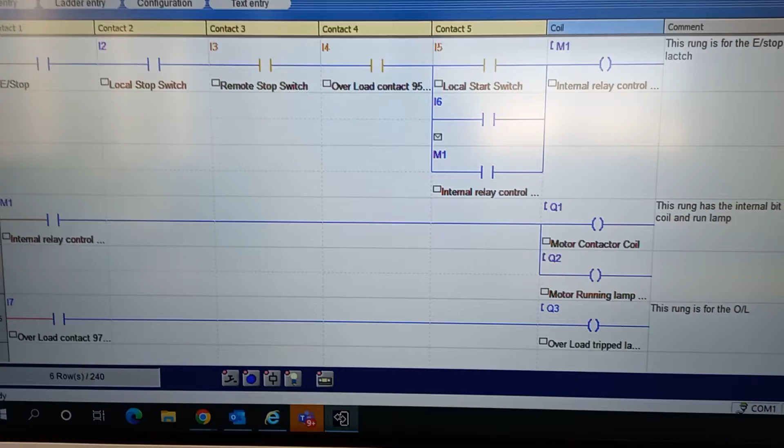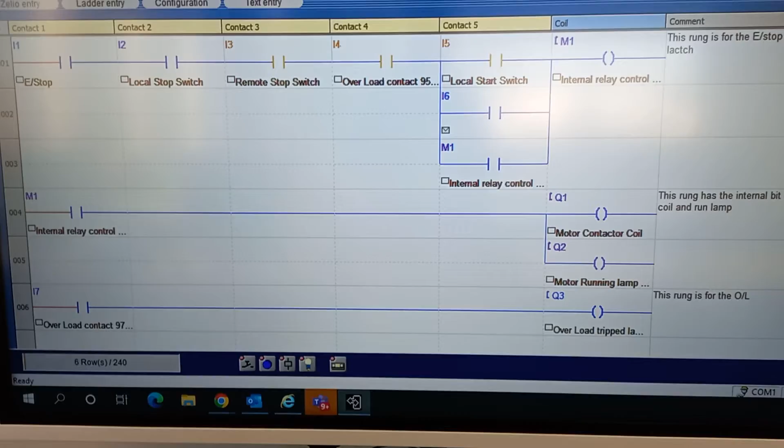Here we have a typical direct-on-line motor starter control circuit. I've done this on the Zelio Soft 2 software, and it's actually running in the simulation mode at the moment. Now I've programmed my e-stop and my local stop and my remote stop as normally open contacts. The reason I've done that is that in the field they are actually normally closed contacts. So by programming them as normally open, when the PLC goes into the run mode, they will then go true.

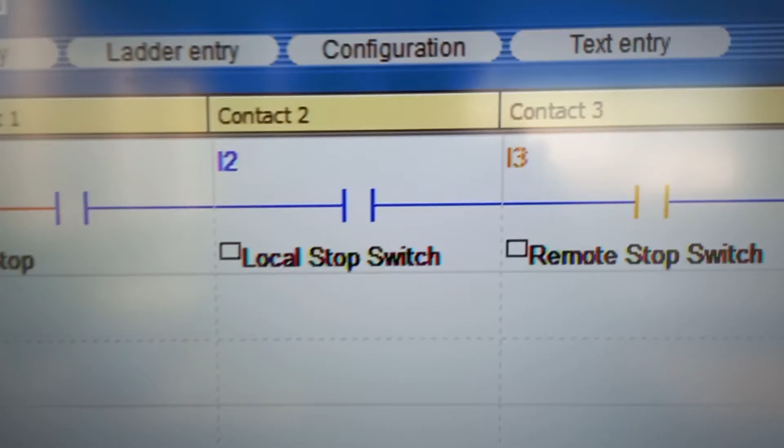As it scans those normally closed contacts, it will actually put a 1 in the input registry for those particular inputs. I just noticed that I had that one turned on. Let's turn that off and turn that off and turn that off. So let's give this a little run and see how it performs. So I'm going to activate, because this is simulation, I have to force these closed.

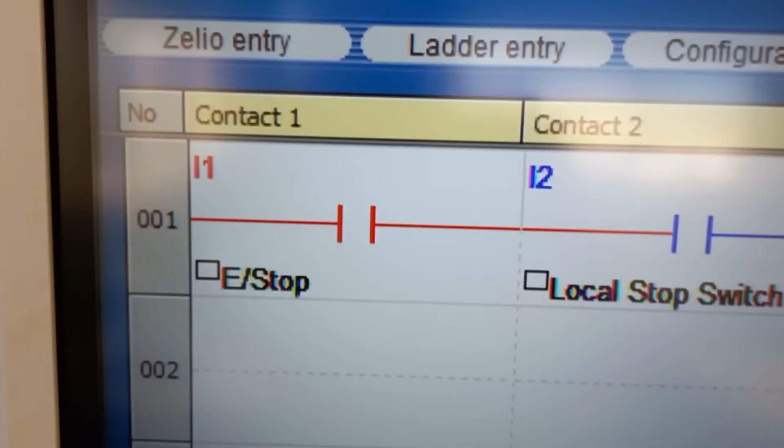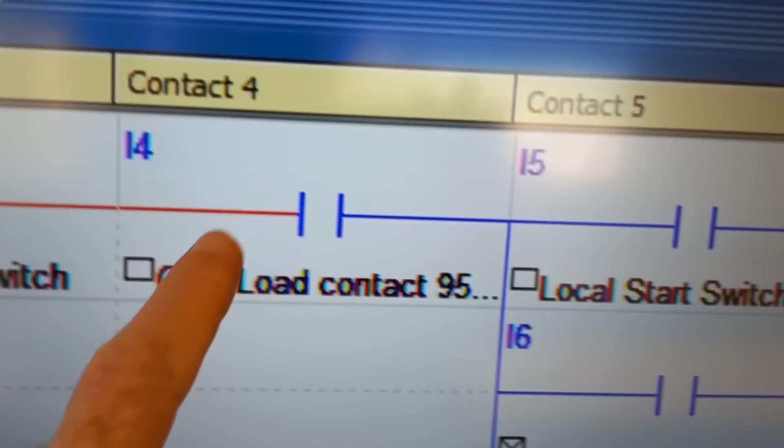So I've just brought my e-stop true. Now I'm going to bring my local stop. Then I'm going to bring my remote stop closed. Now I've got an overload. The overload hasn't tripped at this stage, so I'll just put this ready closed so the motor can start as soon as it gets the local start switch command.

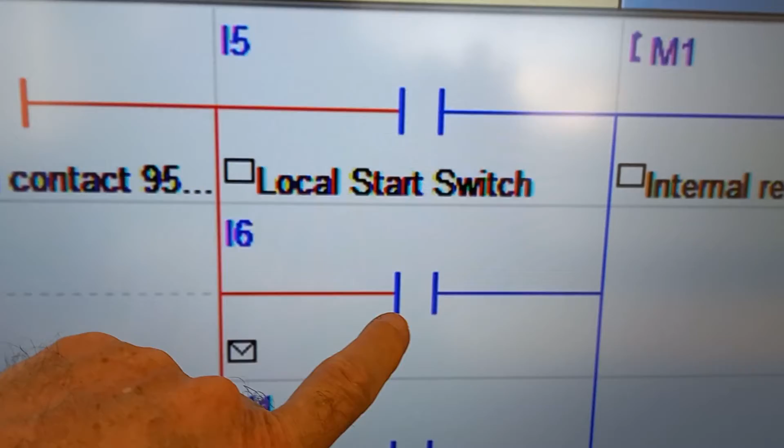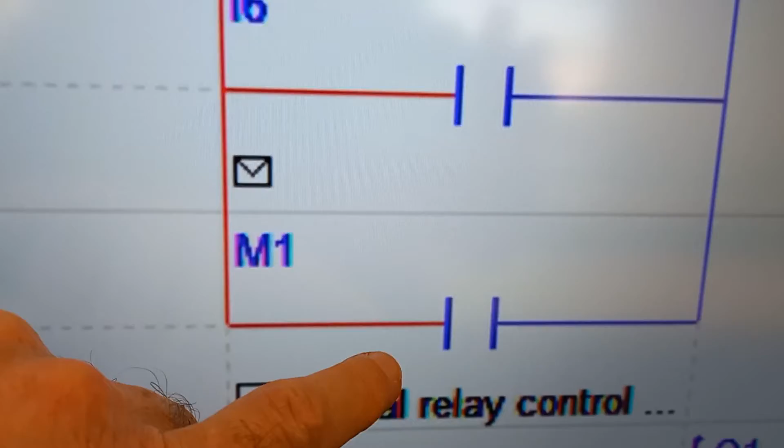So my local start switch, this one here, by the way, I forgot to label it, is actually going to be my remote start switch. So this particular program has got a remote stop start built into it. So just for your reference, stops and safeties always in series, and starts and latches always in parallel. So here I've got my local start, in parallel of that I've got my remote start, in parallel of that I've got my latch.

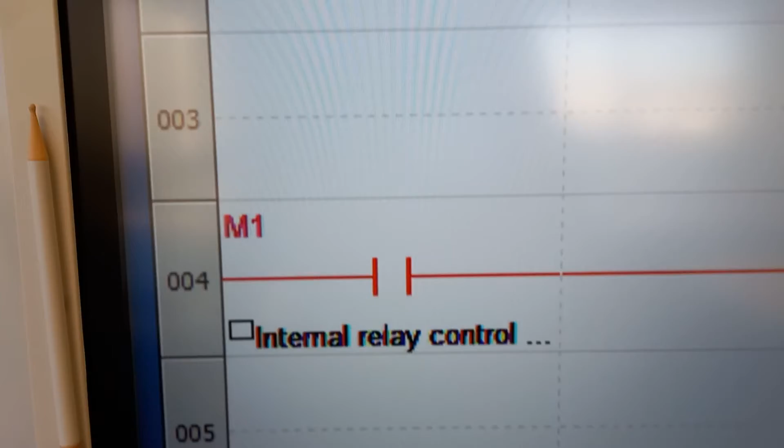I'm using an internal relay here that's going to be energized once I hit my start switch. So now my internal relay M1 is true, and I've got a contact that closes off internal relay M1, which is a normally open contact. That's now true, and that brings on my actual output, which is Q1, which is going to control the motor contactor coil. And I've got a running lamp, which is also now on, which is addressed to Q2, which is going to be probably a green lamp that shows that my motor is running.

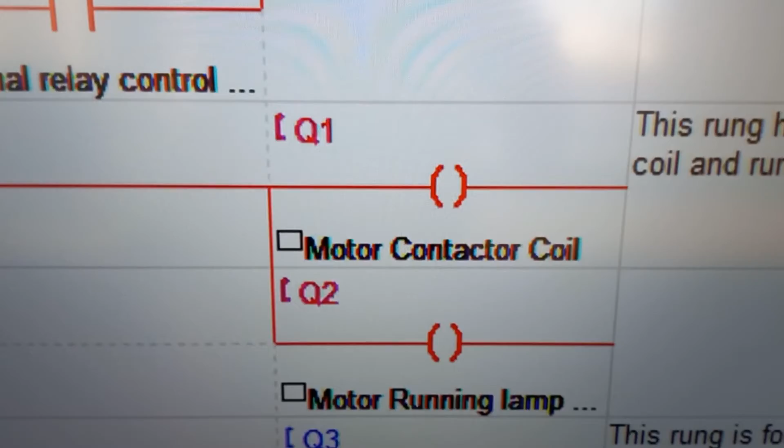Okay, so everything's going well. I'll just pull back a little bit, and we can see now that the motor's running well. It's happy with everything running. But let's see what happens if I have an overload situation. So say, for example, this motor is driving a pump, and the filter gets blocked and the pump starts to become quite difficult for the motor to drive, and it starts to have an increase in current. That could operate the thermal overload and trip this out.

So now that's tripped, it's knocked off my M1 internal coil, and it's knocked off my contact off M1, which has opened the contactor Q1, and also the motor running lamp is off. And when that comes off, I have to actually operate this because I don't have the overload connected to the PLC. This is like a flip-flop arrangement, so 95, 96 go open, and 97, 98 go closed.

So this goes closed, brings up my overload tripped lamp. Possibly I could have an audible alarm in parallel of that, maybe a siren, letting us know that this particular motor has now tripped out on overload. So very easy little program to write. In simulation, I don't have any real inputs and outputs connected to this, so that's why I've had to intervene to simulate the operation. So documentation is fairly straightforward.

This one here will be the mushroom emergency stop, which is only activated in the event of an actual emergency taking place. So those three are in series with the thermal overload contact. And these here, of course, in parallel. Just stop it for a moment. Bring that closed and knock that one there off as well. So it's all in its sort of rest state at the moment. Just the E-stop is closed.